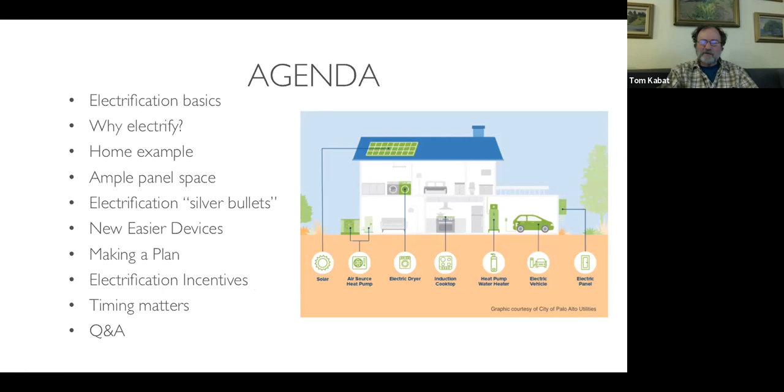But on the topic of why electrify: PCE, which stands for Peninsula Clean Energy. They're the joint powers agency made up of all the cities and the county in San Mateo County. Together, that public entity provides 100% carbon-free electricity already today. So they're the portfolio manager that goes and gets the electricity that is provided across the PG&E wires in the county to our homes. So we already have carbon-free electricity, and it's a great stepping stone.

It's a clean, green stepping stone to move into getting rid of the chemical energy delivered to our houses and the chemical energy we go to the gas station to pick up. So this clean electricity really enables that quick transition away from fossil fuels. And then we really have to electrify if we're going to meet all our needs with clean renewables. We can't really meet our needs with clean renewables without electrifying pretty much everything on the ground. So that's just the way the physics are working out.

The nice thing is going that route produces cleaner air, both indoors and outdoors. It also saves energy because electric devices, especially these heat pumps, are 3 or 4 times as efficient as anything else out there. And induction cooking is twice as efficient as old electric coil cooking that everyone thinks of when we say electric cooking. These things save energy, they improve health, and they improve safety around the home.

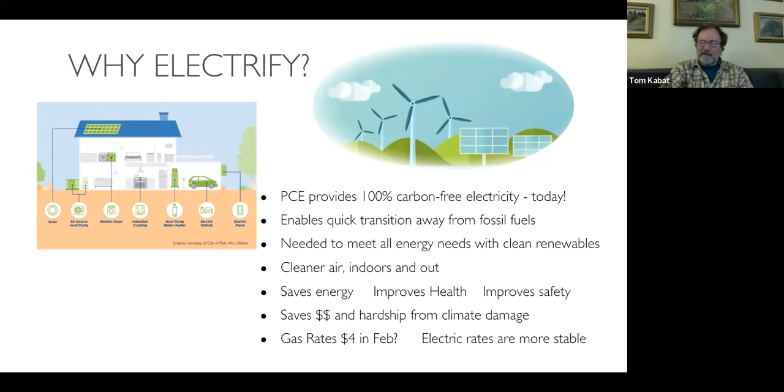Okay, so what is this building electrification I'm talking about? It's basically replacing the major fossil fuel users in the house. So replacing the gas furnace, the gas dryer, the gas range, the gas water heater, and doing home car charging so you can replace gasoline for the car propulsion. And so we tried to really focus on using high efficiency electric alternatives to do that, not just old electric resistance coils that everyone thinks of when they first think of electrification without knowing about the new efficient technologies.

And then also lots of people who do this like to combine rooftop solar because it's a cheap source of energy to help reduce their total utility bill. And also it gives them a chance to pursue home batteries, or coming out very soon now is two-way vehicle to home charging, where you can charge your vehicle from your home, and in outages, you can charge your home from your vehicle. That kind of technology is just coming out onto the market now, but things keep improving. So these are the major 5 end uses I'll be talking about. End use means providing thermal comfort, like from a gas furnace, or providing clothes drying from a clothes dryer.

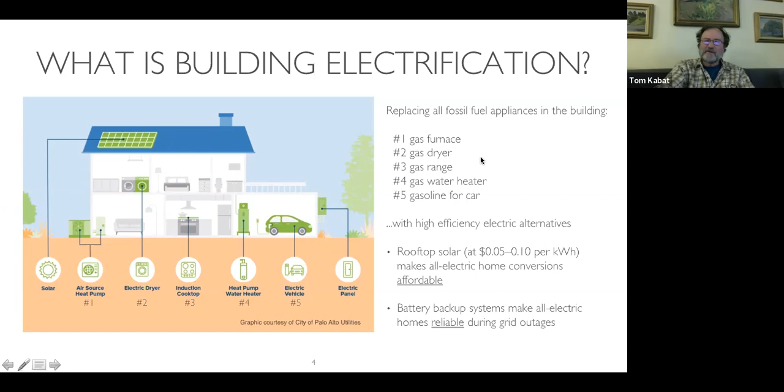So part of this, I'll talk about an example home. It was 1,900 square feet with 4 people. They had a 100 amp electric panel, and 100 amp electric panels used to be pretty common in homes built up into about 1970. And since then, they've been using more 200 amp panels when they build them. And an amp is short for ampere of electricity.

It's an amount of current that flows, and 100 amps of current is enough to provide 24 kilowatts of power. And so we're familiar with power, like from a 60 watt bulb, the watts are the power, or a 100 watt bulb. But 24 kilowatts is 24,000 watts, so enough to run 240 100 watt bulbs. So anyway, I'll talk about amps sometimes and watts sometimes, but amps are current flow, watts are power, and they're in proportion to each other.

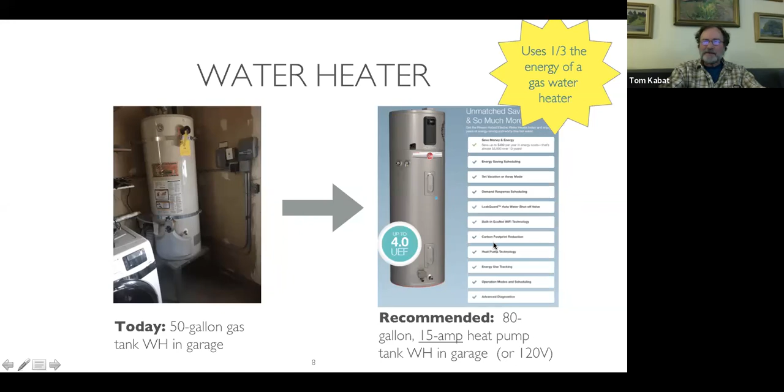And so it either heats or cools the air. It does both things, so it's good in both seasons. And in this case, we were recommending a very efficient 3-ton inverter-driven heat pump. And our inverters are computer-controlled devices that control the amount of current and voltage arriving to the motor, to change the power of the motor, to change the speed of the motor, to change the amount of the power rating of the work it's doing.

So the nice thing about these inverter-driven heat pumps is they will cruise down to the equilibrium power needed to keep your house at your set point. So they won't be running super powerful and then shoot past your set point and then turn off and slam off like your furnace and coast and leave you kind of in the cold, or leaving your house kind of declining in temperature, and then they rocket on again and climb. That's what your furnace does, but these inverter-driven heat pumps, they kind of get steady and they just kind of oscillate right at the set point.

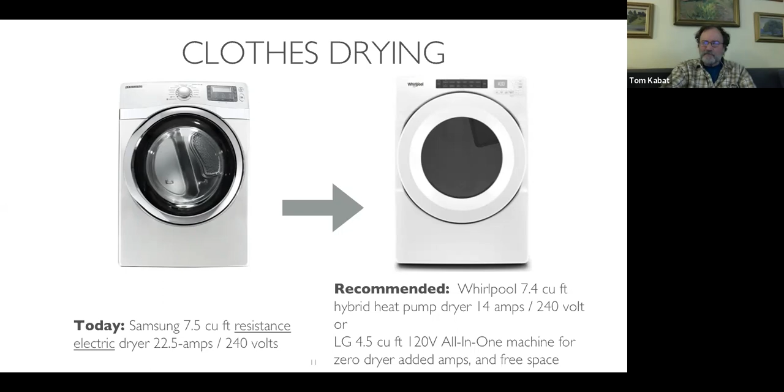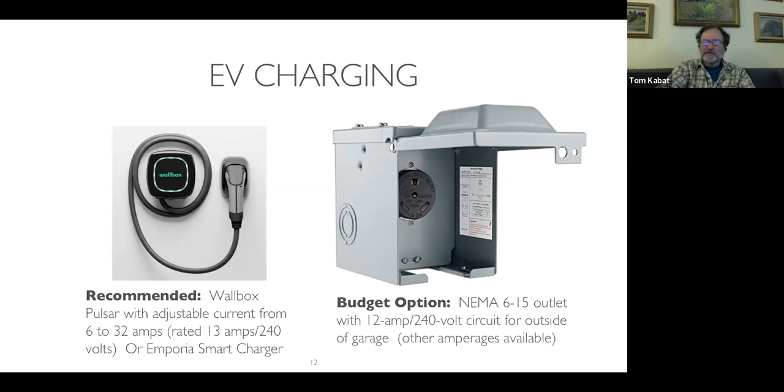The other way to go is off here on the right side, which is just to put in a smaller amperage plug. And they make these different sized plugs that kind of top out at different amperage levels. This one was a 12 amp, 240 volt plug. Well, if you want more power for car charging, one of the ways you can go is to start adding circuit sharing or automatic load pausing controls when needed.

So some houses, actually one house only had a 60 amp panel, but it was a 2.5-story house. And so in that case, it looked like, oh, this might be a good case to put in one of these smart panels, but it's a $3,000 piece of hardware with another couple thousand dollars of installation expense. So they really tend to earn their keep when somebody's trying to stay on their existing electric service line. I mentioned that line that goes from the utility to the house.

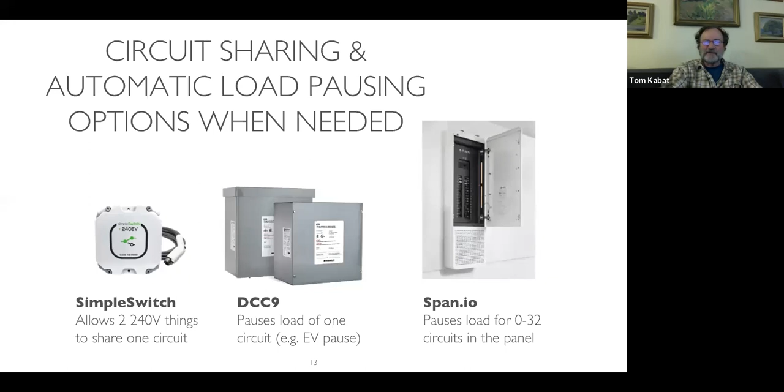In this house too, since we were looking at that 100 amp puzzle, we suggested that they use the largest size solar system and battery system that can fit on a 100 amp panel according to the electric code. And that works out to be about 5.8 kilowatts of solar, kind of trimmed down through an inverter and then backfed onto the panel through a 20 amp breaker.

And so that's a route that they could go, or they could also use the solar tax credit, which is now 30% of the cost of putting in solar and batteries, and anything associated with getting the solar in, like new roofing and electric panel upsizing to accommodate the solar. So some people choose to use their solar adventure as a chance to upsize their electric panel with a 30% tax credit.

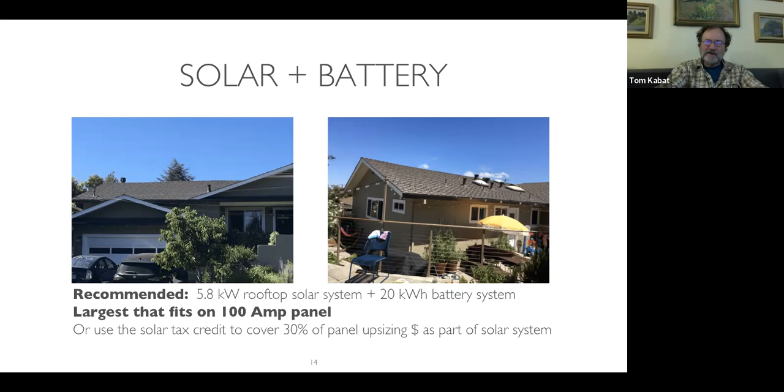In this house too, we were looking at different building shell improvements with those heat pumps. They have a slower, steadier thermal power, and they aren't quite like an oversized rocket like a lot of our gas furnaces. So it's nice to put in more insulation. And also, since electricity is a relatively expensive fuel, the heat pumps are very efficient.

They're using 1 unit of electricity to go gather another 3 units of heat from the yard and put all 4 units of heat into the house. So they can have a 300 or 400% efficiency compared to the thing we think of when we talk about electric heating. We think of those electric resistance space heaters, which are only 100% efficient. They just heat up the wire and your house gets all the heat from the wire.

But they're just a toaster and a fan combined, whereas the heat pump is this great heat moving machine. It's like I said, it's a backwards refrigerator. It will go grab heat out of the yard and jack that heat up to 120 degrees and use it to heat a coil, blow the room air across the coil, heat that air up and blow that into the room.

Okay, so in this house though, they only had about R19, about 6 inches of insulation. We recommended they double that, and that would make it more affordable and comfortable. In the crawl space, it didn't have any insulation.

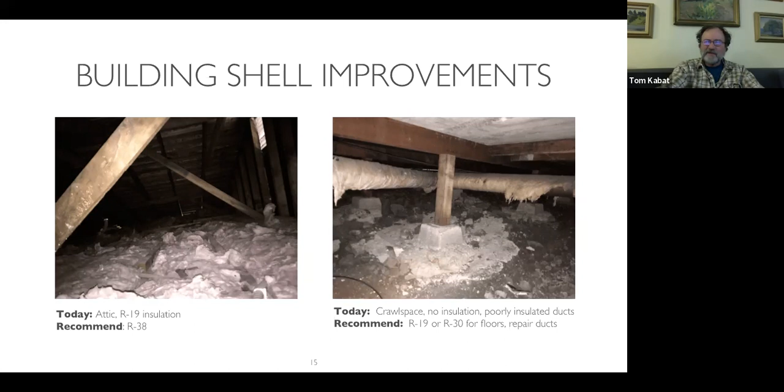We recommended they consider going up to R19, but crawl spaces, it's a little bit hard to really save much energy there. I've heard it does produce some more comfort, but it's hard to find the energy savings because the heat doesn't really travel down that much. So it's not always an important item.

Okay, so I wanted to mention some of these silver bullet technologies. What were the things we found that are making it easier and that we tend to recommend? And so they are things like the 15 amp version of heat pump water heaters, and also the new 120 volt plug-in versions.

And I just had the pleasure of installing one of those with a nonprofit I volunteer with. And the 120 volt one is, boy, it's a lot closer to a washing machine in a way, because it has all the same connections a washing machine has. It has a hot line and a cold line for water, and it has a 120 volt plug. And then it has a line that wants to drain a little bit of water too. So same as my washing machine has.

Anyway, we really like those 15 amp versions of the heat pump water heaters or the new 120 volt versions. If you have a sheltered place to put it, like a garage that stays above 40 degrees Fahrenheit, the 120 volts can work there. If you've got a place that's going to drop for long periods below 40 degrees Fahrenheit, then maybe the 15 amp one works better.

We also ended up recommending frequently these types of inverter-driven heat pumps that were about 17 amps of power load on the panel to provide what we call 3 tons. That's 36,000 BTUs per hour of heat. They tend to be very power efficient and quiet. So that was one of the nice things about these inverter-driven ones.

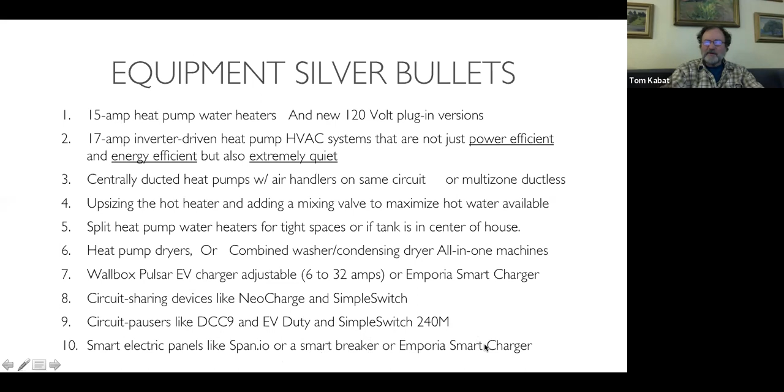And then I also showed you that smart panel like Span.io, or sometimes you can get by with just one smart breaker or that smart charger solving the problem. So now they're coming out with all these interesting 120 volt, just plug in the regular outlet. So you don't need an electrician for the things on this page.

So there are heat pump water heaters like the one I got to install the other day. Rheem is the first one on the market making them. Others are coming soon. Rheem has 2 models. One of them would need its own dedicated circuit. The one we installed the other day could share a circuit with other devices. It's only using about 400 or 500 watts on a circuit that can easily deliver 1500 watts. So there's room for other things on the circuit.

The one that needs a dedicated circuit had 2 compressors in it, and so it was using more of the circuit. They didn't want to risk putting other stuff on there that would trip the circuit and leave the person without hot water.

So I told you, I really like this kind of 4.3, 4.5 cubic foot combined washer dryer machine, but that's not for everyone. Some people want to have 2 different machines to manage. And so for those, they make nice heat pump dryers. Let's see, I don't have that on the list here, but who is it? I think Whirlpool makes a great 7 cubic foot heat pump clothes dryer.

And then we like packaged heat pumps. So they have these funny initials, packaged terminal heat pumps. There's one from a company, I think they're called Ephoca, and they are very quiet. And you drill holes through your wall to mount that thing in the room.

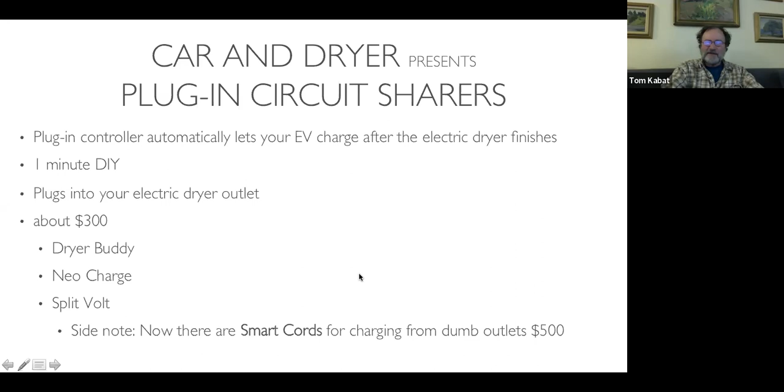And now there's something called smart power cords for charging your car. So it's taking the smartness of a smart on-the-wall car charger and putting it into that portable charger that may come in your electric vehicle trunk. So you might look for smart EV cords. So now I want to talk a little bit, I've gone over a lot of products so far.

And then I thought we'll talk a little bit about some information sources that are increasing. And so there's more of us doing these things and putting out materials and providing advice. And there's a few different concierge services opening up where you can go to these companies and get advice for how to do your electrification, how to make a whole electrification plan.

One of the things I like to help out with is the Ask Sean show. It's put on by a group down in 350 San Diego, and they bring in Sean Armstrong, and then I help out some. But it's a call-in advice show about home retrofits, and it's the second Wednesday of each month at 7 p.m. So you might look them up.

There's also a home electrifiers group on Nextdoor, and that was started by Josie Gaylord. In that group, we have now almost 180 participants, and it's people sharing their advice, their ideas, their stories, and their questions about how to electrify. So it's a peer-to-peer advice group for how to get your projects done. It doesn't talk about policy there, but it does talk about how to get the work done.

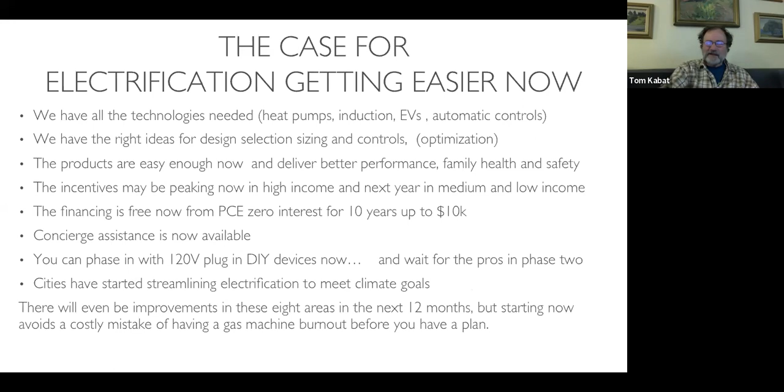Anyway, there have been improvements in these 8 areas, and there'll be probably some more in the next 12 months. We'll see how that goes, but it's really kind of a mistake to let things burn out and force you into a corner. So I'll talk in a little bit about making a plan and being ready.

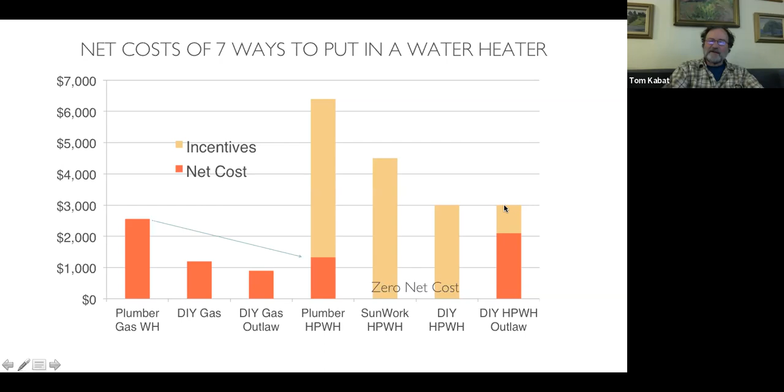All right, so I mentioned that there's more incentives for medium and low income customers. So California will likely roll this out in late '23 or early '24. And these incentives will stack onto the other incentives and be applied before the tax credits. The tax credits kind of apply to the amount after all the other incentives.

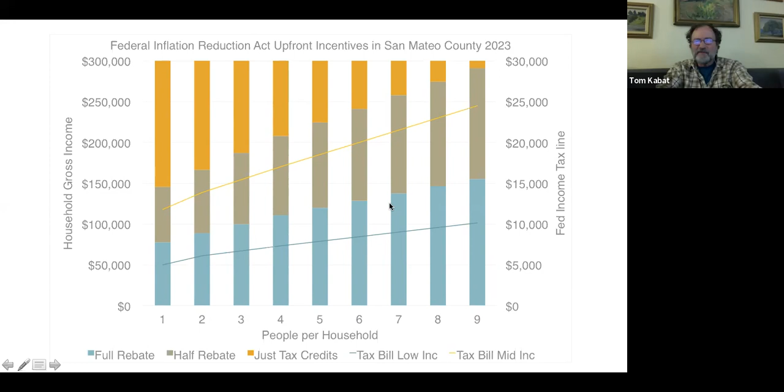All right, so here's one example done before those upfront incentives. So we've got a bid price on this of $4,300 minus the Peninsula Clean Energy $3,000 incentive, minus the BayREN $1,000 incentive. It's before those upfront rebates from the IRA, but the IRA tax credit is still there. It was 30% of $300 and some dollars. It was only $93. And so the net cost was $218.

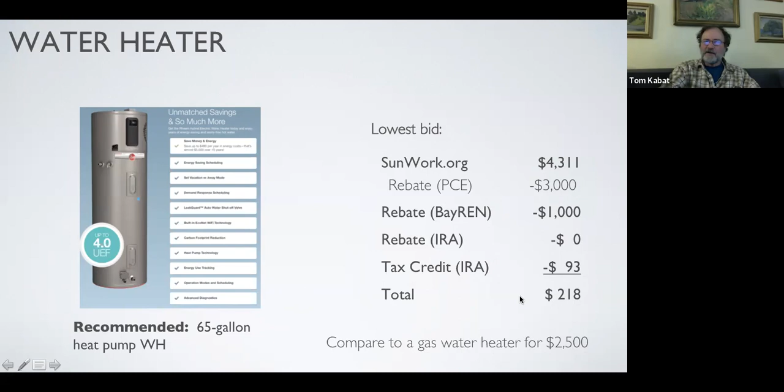You could do this tomorrow, and you could compare it to the cost to buy a gas water heater, which is $2,500 through a plumber installed, same as this. So it's really brought it down to where it's looking like 1/10 of the cost right now. So that's why I think, oh, we might be in peak rebates. These look a little rich.

Here's the same kind of example, although I did this one with the medium income customer getting the upfront IRA incentive in 2024. So let's say they had a contractor bid come in at $15,000. They get the PCE rebate, it's $3,500, another $1,250 from BayREN, and then this upfront IRA incentive is $4,000. The remaining amount was eligible for up to $2,000 at a 30% tax credit, but it was a little bit smaller than that. So 30% of it was only $1,985.

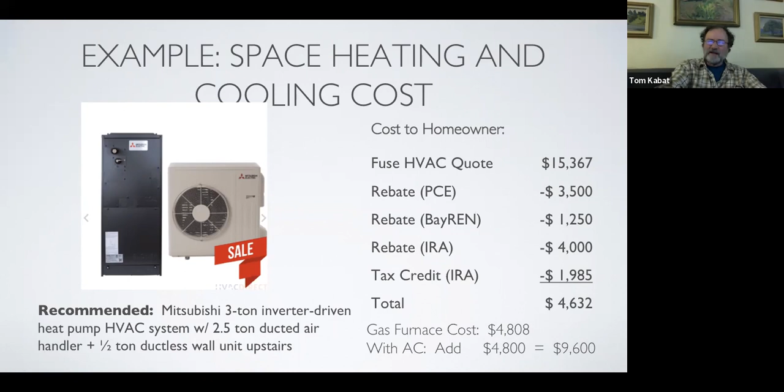So now the net cost was $4,600 for this thing that heats and cools you. So it'll provide air conditioning. So you could compare it down below to just a plain old 80%, bottom of the line gas furnace installed by a contractor, $4,800, or $9,600 to also add air conditioning. So anyway, we've got something that's, for the middle income customer, even below staying with just replacing with gas, and way below getting cooling with it too.

So ideas for timing, maybe start right now by making a plan. So you can fit it all on the panel to save anywhere from $2,000 to $5,000, and it may be saving 6 months of time waiting for PG&E to do any upsizing they have to do if it's something that needs studying from them. So the plan really helps you save both money and time, and also leave more space for other people to electrify so that they can save the climate for your kids.

The water heater does seem like the most urgent thing at my house, maybe at yours. So since it's sensitive, I thought I'd move it to the front of the line for what projects to do. And then either put in the circuit to save future time on the water heater, or I really recommend doing the whole water heater and just save the time and money, because often contractors won't give you a discount for already having the circuit. That's one of the things I find when they're bidding. So there may not be much savings in money for pre-wiring. You have to shop around to see if you can find it.

Also, people say you should insulate before the heat pumps. I hear that from other people. I think, why? Don't delay the heat pump. When you need it, put it in, and get around to insulation when you can. Because really we want to avoid delays caused by a sequencing mentality in all kinds of places. So be careful of that if you're sensing you're trying to sequence too many things.

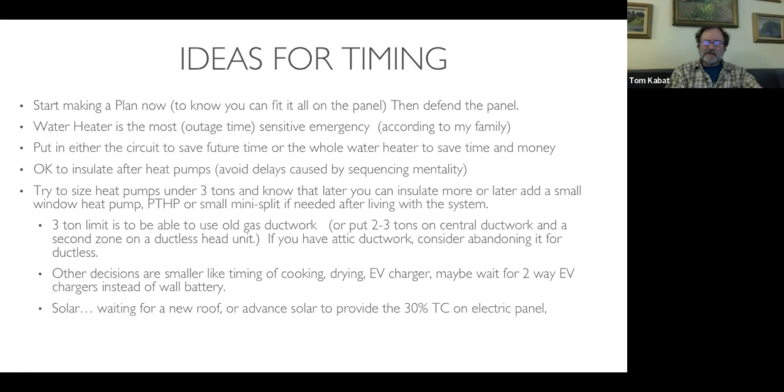For solar, the one thing you may want to wait for is to take a look at the condition of your roof. If your roof is new, you can go ahead and do solar right away. If your roof is on its last legs, you really want to get the roof done either as part of the solar or before the solar.

And then I mentioned electrification plans. So a plan really defines what are the types of machines you want and the features, for example, a 120 volt heat pump water heater. And then the size, like I keep mentioning 3 tons or under on heat pumps, or 65 gallons on a water heater size, things like that. The model names and numbers and maximum amperage levels and associated breaker size. You can have your contractor help you figure that stuff out too.

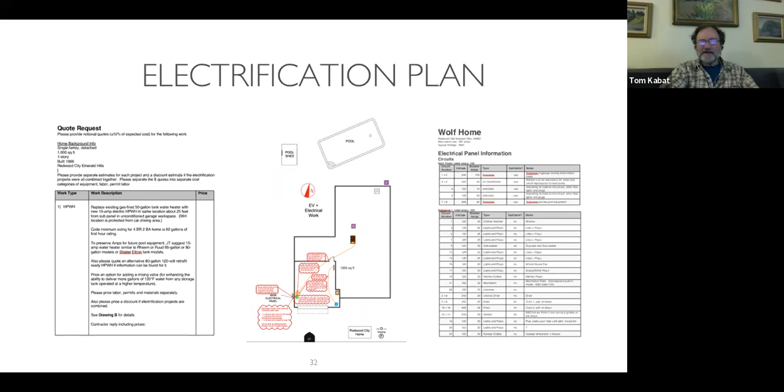And then any controllers, if you're going to be using controllers, you work them into the plan because they leave you with more free space on the panel. And then a list of the circuits you're going to need, so you can check to see, do you want to get all the circuits done at once, or do them project by project? And so there was what one of our electrification plans looked like. It had a floor plan and list of equipment on the left and list of circuits on the right.

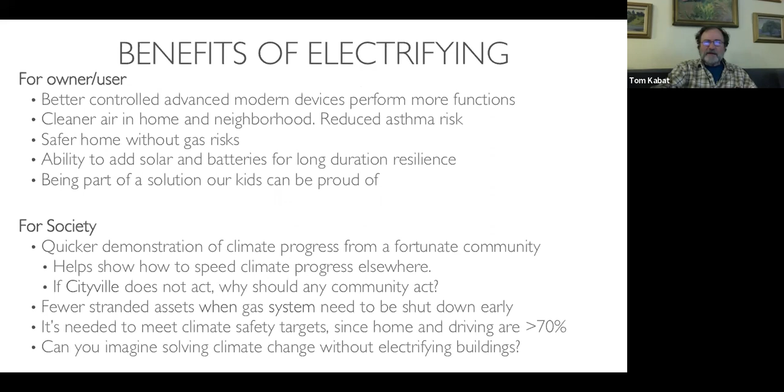So anyway, there's lots of benefits to electrification, but really today's talk is more about what's making it easier these days. So the future probably includes easier permitting if we can get cities to really focus on macro safety. We really have to demonstrate how this, one of the richest counties in the world, can make forward progress on climate if we're going to expect the other counties of the world to also do things in time to save our bacon. So easier permitting with a macro safety focus will really help.

There are more technology solutions coming along. So we have enough now and more are coming and they'll get better. There's the medium and low income incentives, which are probably coming along.

There are more concierge firms and programs that'll probably start up. California contractors are learning skills and they're catching up with the South. The South has been way ahead of California because in the South, they've had to manage heat and humidity for a long time. And out here in California, we've had such nice weather that our contractors only know how to install furnaces, except in some cities that have more heat. So that's been a problem for us in San Mateo County, finding contractors who understand air conditioning and heat pumps enough to want to install them and not just try to talk us out of them.

Better resilience solutions are probably coming along, like vehicle to home charging. And then another kind of sad thing that's coming, we saw the recent atmospheric rivers happening to us, but more climate decay and many associated problems and systemic stresses on civilization are coming because we are kind of late to starting this up. So I think we should have more appreciation coming that we got started today instead of waiting. So try to avoid sequencing, because sequencing kind of slows us down, but here's the sequence you might want to follow to avoid some problems.

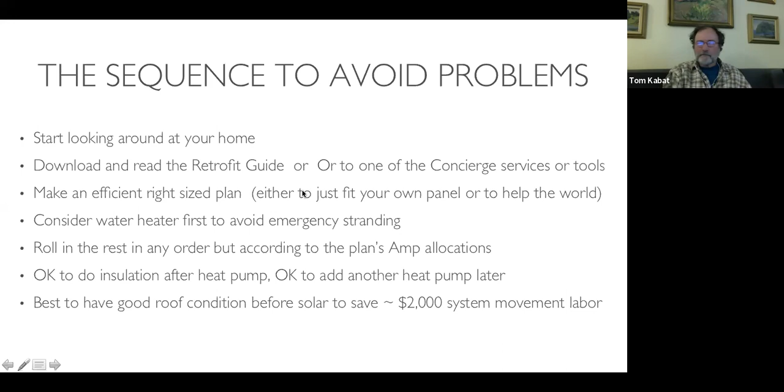Got a multi-part question. The first one, of the early slides you had showed a picture of the panel, like a little cartoon of that. Yep. And I noticed that, if I look at the 50 amp second from the bottom on the right, it says device amp is 40. And it seems all of these are about 80%, but why aren't those numbers the same? Right. So let me think. It's been a while since we made this. What is the exact reason

for device amps? Yeah, so some of them, they make us put in bigger wire, but that's not necessarily bigger breaker. For me, it makes sense on the solar one where it's 16 amps flowing in on a 20 amp breaker. That's easy for me to visualize. It's that they are limiting me to a 16 amp output inverter, and I can put it on a 20 amp wire and 20 amp breaker, because the breaker's the next size above the loading, and that's the normal way to design panels and breakers: you look at the device flow needs and you go to the next breaker size up for what the breaker and wire can handle.

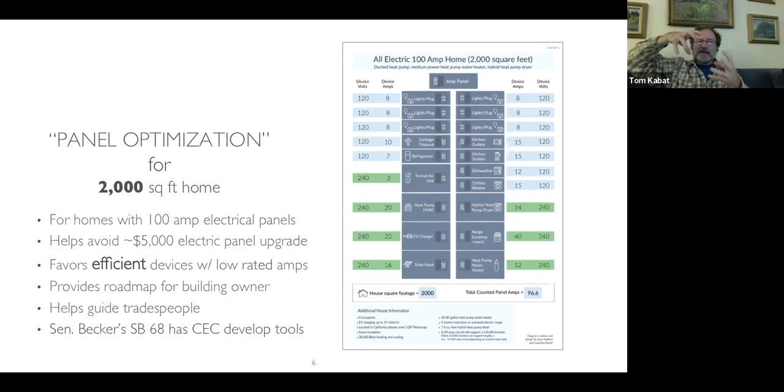So it's just a complex thing that the electricians and the solar guys all understand, but they're trying to not get in a situation where you could possibly turn on so many things and have lots of power coming from the utility and the solar, and together the panel's trying to handle and distribute it all, and the panel gets too hot behind its faceplate. I mean, in that case, wouldn't all the electricity coming from the solar go into the devices? Yeah, it is.

And also, since we're doing counterflow, we're injecting the solar from the bottom and the utility from the top. Yeah, I think the code is ultra conservative, and this is just one of their ultra conservative things. So I kind of agree with your intuition that it's hard to visualize the problem, but the way they describe the problem is they're not going to allow the panel to be sourced by more than 120% of its bus bar ratings. And then only when the sources come from opposite sides. You can't put them both from the top.

So from that rule, with a 200 amp panel, I could have 40 amps of solar. Right. 40 amps of inverter output, which maybe is 50 amps of solar, because you can put more solar on your roof than your inverter can deliver. And the inverter then does what we call clipping.

And so, for example, in this thing, I mentioned we're using a 5.8 kilowatt solar array, and we put it on a 4.3 kilowatt inverter. So there are a few sunny hours of the year when, right after you've cleaned the panels or something, the panels want to produce 5 kilowatts and the inverter says, nope, I'm going to only deliver 4.3 out of here and not produce the other 0.7 kilowatts.

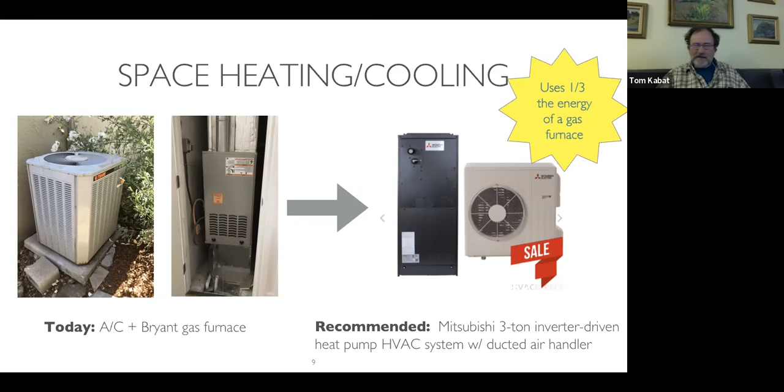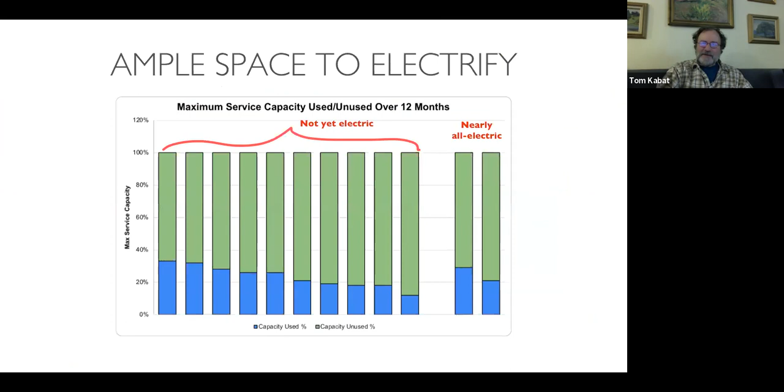Yeah, so the chart and the diagram of that panel is really well designed. Yeah. There's so much put in there, and it's like a Tetris puzzle. Yep. I had been doing these things in spreadsheets, and then Josie was sharing them in one of her groups, and an architect was taking a look at the spreadsheets and saying, why don't you convert the spreadsheets to something that looks a little more real? And so that's where the panel design came through.

Yeah. So I actually have a third question, about the solar installation. Our roof is about 12 to 14 years old. It's a composite roof. There are some small areas that we were told need sealing or minor repairs, but even if the roof only lasts 25 years, we're at the halfway mark. We can't seem to decide, should we install solar now or wait, or should we just get it installed, pay the extra labor to have it taken off, and then pay the extra labor to have it put back on when a new roof is needed? Mm-hmm. Yeah, good questions.

And then there's also one more option, which is sometimes we're just putting solar on one plane of the roof. And so you could re-roof that one plane and not re-roof the 2 or 3 other surfaces of the roof, and put the solar on it. And so then you have a small solar job and a brand new roof under solar, and you're ready for 30 or more years. The other thing I notice is these composite shingle roofs can last quite a while too. So I think they can outlast their rating.